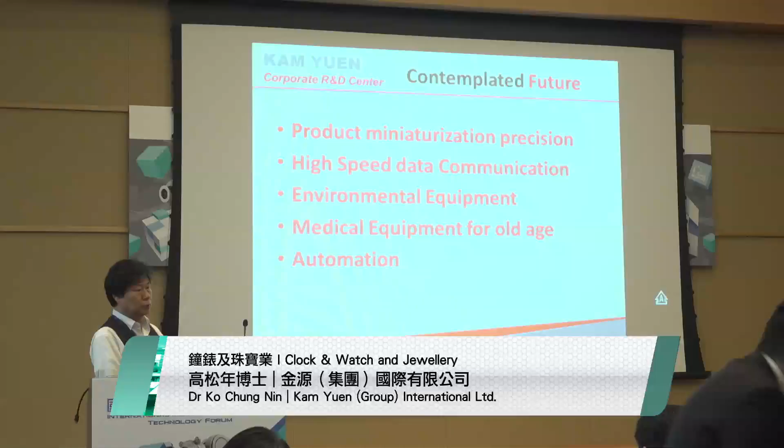The first thing you can look at is product miniaturization. A lot of products are getting smaller and smaller because of the requirements of space and lack of energy to operate it. It means things have to be more precise. So precision engineering will definitely be a hot topic in the future. This is something I anticipate, and I have to build my team towards this area.

The other thing is high-speed data communication. You always find people saying it takes so long to download a film, so preferably they want to download within 1 microsecond. That is the kind of voice coming from consumers. So the data communication business is one of the key areas in the future too.

Thirdly, environmental equipment will definitely be one of the hot topics, because environmental problems are indeed a big problem. How do we go about it? We can make ourselves and our habits more environment friendly, but also from the manufacturing point of view, we should try to make equipment that can serve this market. This is another dream I have, to make something more in that area.

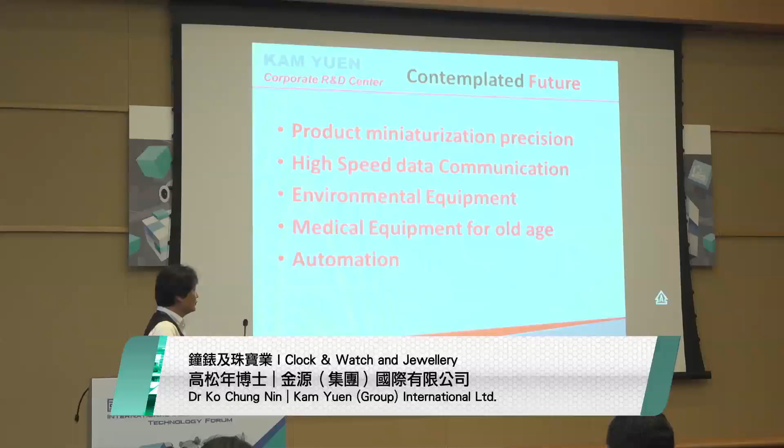Medical equipment is definitely a hot topic because people are getting old, regardless of whether you're in Japan or Hong Kong. By 2020, I think 1/5 of the population in Hong Kong will be over 65. So that will be a big market regarding all the accessories and equipment for helping the elderly.

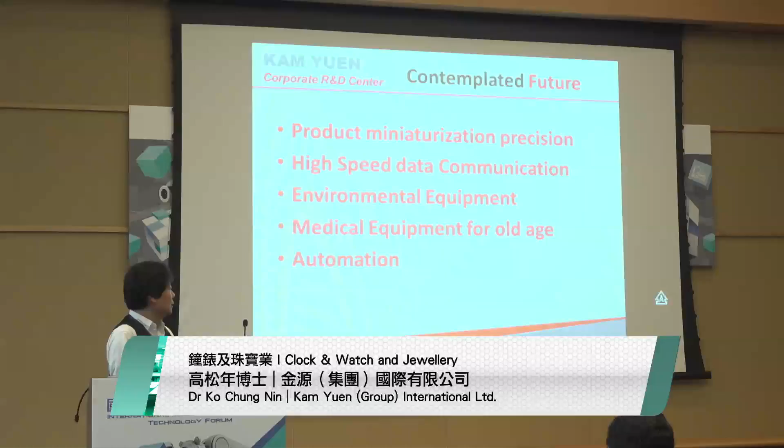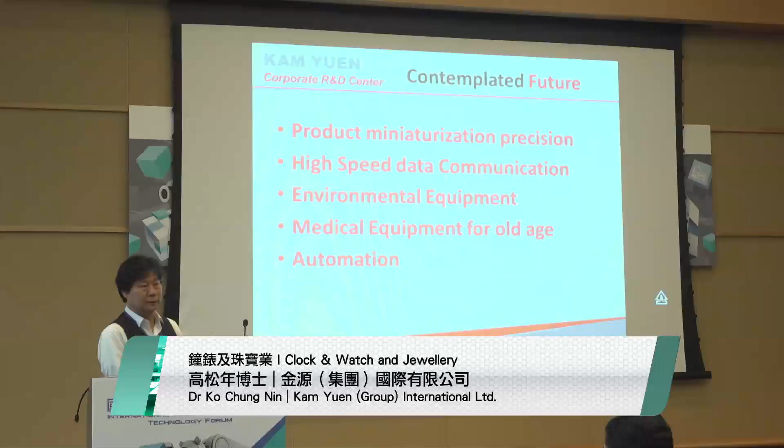And lastly is automation. Automation is necessary, indirectly because of the old age problem, since we don't have enough laborers, and because labor cost is expensive. There are many reasons for automation to happen, but automation doesn't happen alone, as I said before. I will explain more in the coming slides.

So our business in Kam Yuen: we try to help our customers solve their problems, looking from the eyes of our customers, trying to find out what their problems are and help them. Not our problems, but their problems is what we mind.

Secondly, new material application is something we want to further develop, because new materials are a must. If you want to go for precision and more sophisticated applications, new materials are really necessary. Precision engineering, as I said, will be getting more and more popular.

Sensors are one of the things in the upcoming future. I think most things in the future will have sensors, because we want to save money, save time, and save a lot of space as well. So sensors will be one of the key areas, and something we're working on too.

Automation processes and equipment, we are definitely working on that, not for external use, but for our own use, because we have about 5,000 workers and want to reduce the number down to a reasonable level. So automation process is a must, and we can help ourselves. Maybe later on we can help others as well.

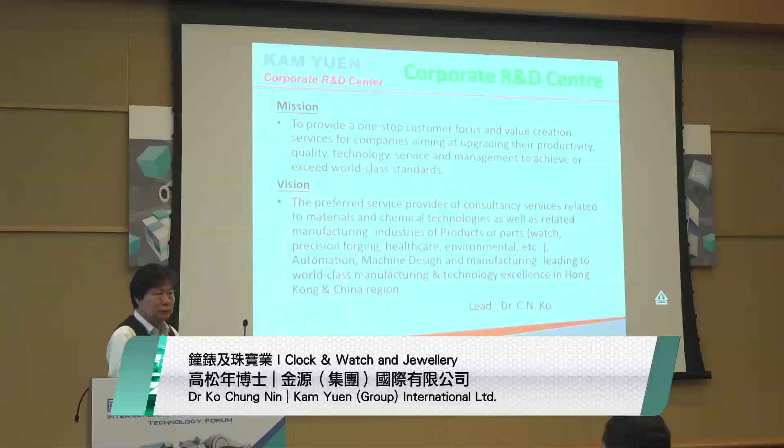I think if you look at the world nowadays, people are trying to separate. They don't want to combine or work together. You can see Brexit, and you can see what's happening with Trump. People want to retain their own jobs. Why? Because people are afraid of competition. But without competition, we will never get new jobs. So competition is a prerequisite, we can't avoid it. That's why if you want to get a job, I think you have to be better.

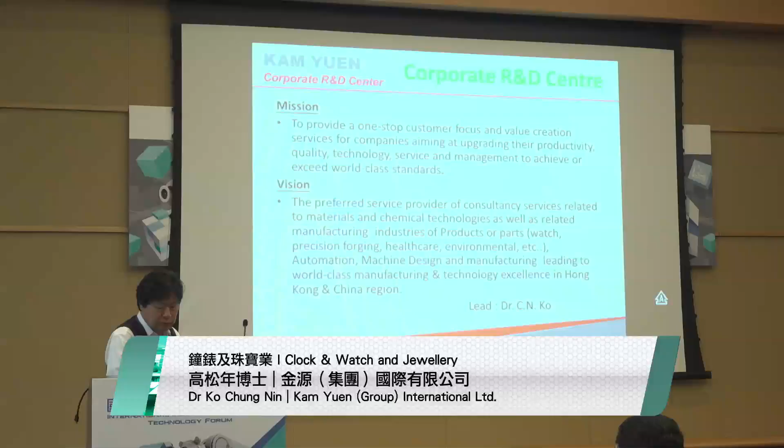Our vision is to be the preferred provider of consultancy service related to materials, chemical technologies, as well as related to manufacturing of products and parts. Watch, precision forging, healthcare, environmental, automation, machine design, and manufacturing, leading to world-class manufacturing is what we are striving for.

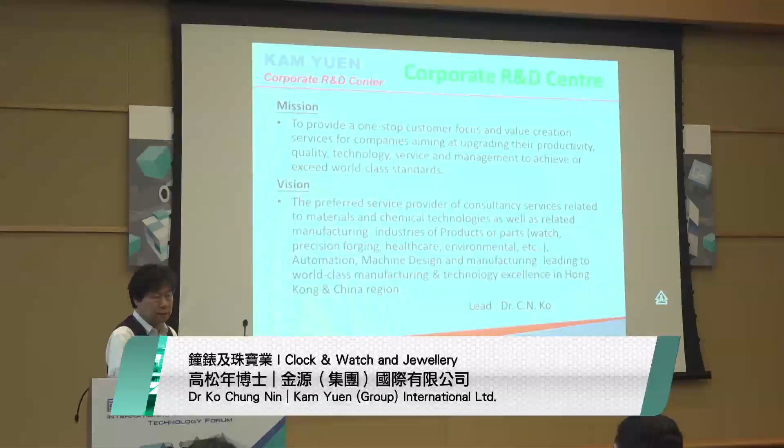Our R&D team doesn't contain a lot of people. It has less than 50 people, but we all need very good people in our team. We don't want a lot of people, but we need people who are really keen on doing R&D.

So basically, we have four blocks. The main thing you have to look at is applied R&D. We are not doing R&D for the sake of publishing papers. We are doing R&D for the sake of getting into the market. We have identified a few key areas we focus on. One is materials technology. Whatever industries you are in, at least in China or Southeast Asia, you really need to understand your materials and how to apply them. So we have our own R&D lab with a lot of analytical equipment, helping us do various things like reverse engineering and product design, etc.

Failure analysis, of course, and simulation modeling - this is one of the key areas that I think is missing quite a lot in Hong Kong, and I think this is very crucial. Whatever project we start with, you don't start with making a product and testing it. Actually, you should start with brainstorming and finding out the ideas, and make sure how it works and whether it really works or not by doing a lot of simulations and virtual reality, to make sure that what you intend to design and make actually works out before you go and make your prototype. You don't do simulation to prove your prototype, you do simulation to get your ideas at the beginning before your prototype is born. So this is why we're so concentrated on this. I'll show you something about this in due course.

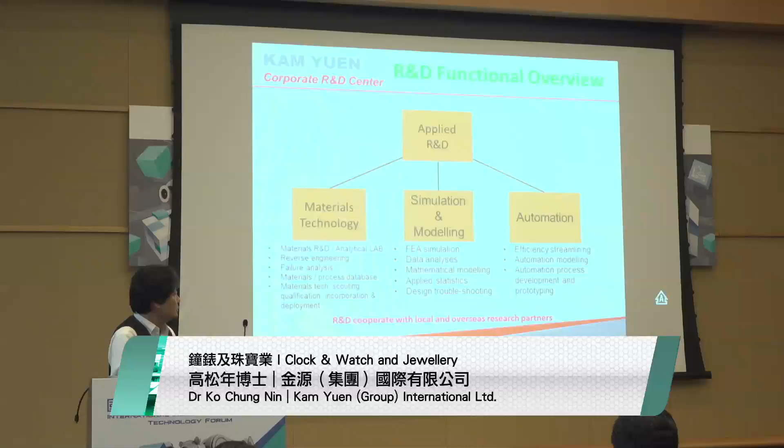And then automation is the part I will focus to talk a bit more about. It's basically to do automation in a factory. You don't go and buy machines and use them in your factory right away, because then you can't really do much automation. Automation can only be done if you actually do lean manufacturing first. Before you can do lean, forget about automation because you're wasting money. So first of all, get the lean done, and then you can go for automation.

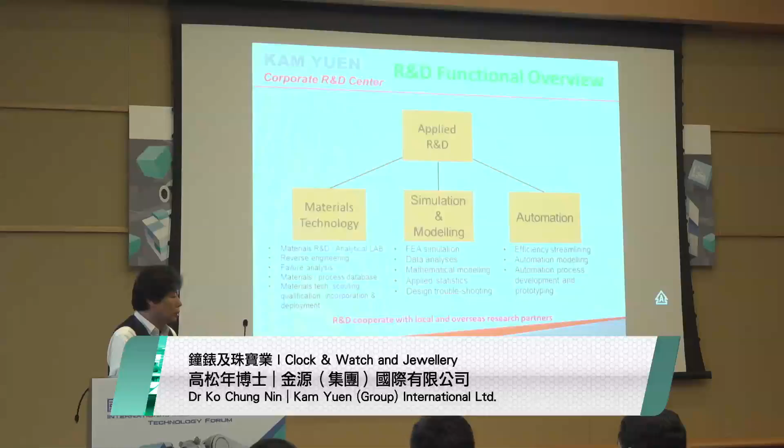When you do automation, you should not automate a complete line, where you press a button at one end and get something out the other end. Yes, you can do it, but it's very expensive, and it will become obsolete very quickly too. So what you have to do is build some building blocks, small automation modules, which you can then combine together to form your big cells and big automation lines.

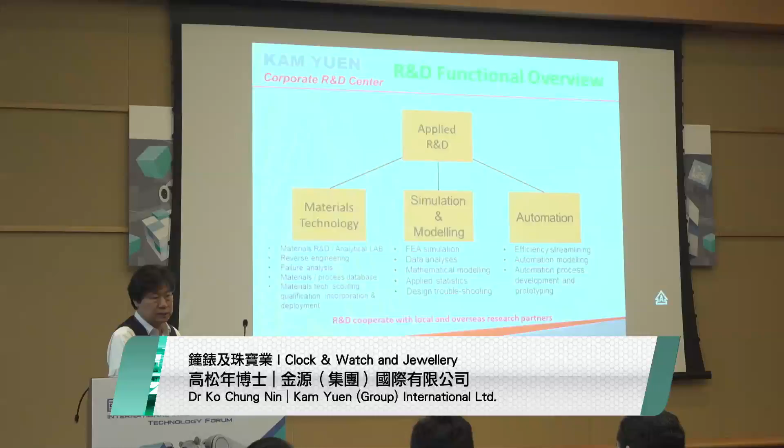We can't do everything with my own team, because there are so many things where we need to seek help, and we don't know, or we have no equipment. So we try to cooperate with local and overseas research partners. This is one prerequisite: you work together, then you get something that we can share together.

Our lab, as I said before, we use for raw material assurance, reverse engineering, and failure analysis. These are the day-to-day things we do, apart from material research and product design. So I'll show you one example of what we do.

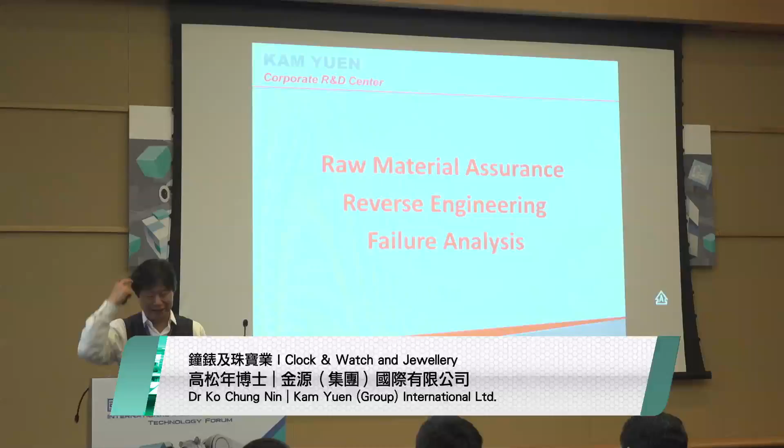I think you know what these mean: material assurance and reverse engineering. Reverse engineering is when you want to do something, so you buy one, dismantle it, and analyze everything inside to see how it's made and how the parts combine together. It looks easy and sounds easy, but it's very difficult because there are many things inside that you can't see just by dismantling it. But anyway, that's the first step.

Something to share about this case: we had machines which kept failing. We have very large bolts here - you're talking about M30, something really big. And they kept failing, all of them, 16 of them, and we didn't know why. We went back to the design and couldn't understand why it failed. It had worked for a while, but it still failed.

So we took the bolts in and analyzed them one by one. We took the hardness - very simple, we just measured it. We found the hardness was actually something like 32 to 40 HRC. But we thought we were buying 12.9 grade bolts, which should have 38 to 44 HRC. So actually, we paid for 12.9 but got 10.9.

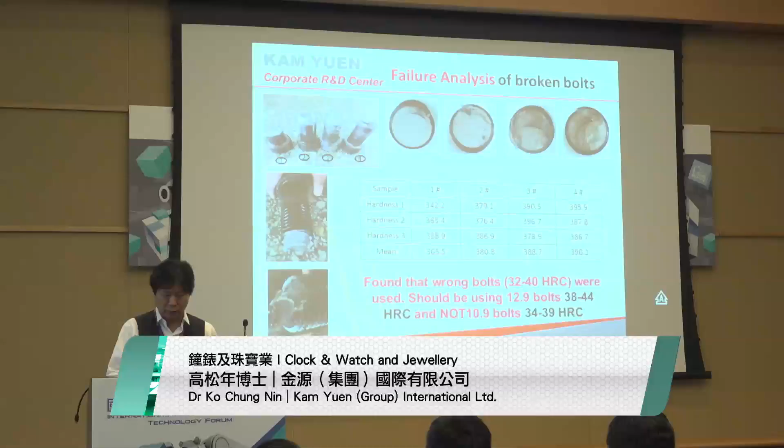So actually, we had been cheated, but these guys didn't know. They kept using it and put it in their machines, and that failed. We only found out once we got this failure and looked into it through analysis. This is a pretty bad thing. After that, we had to change all the bolts in every machine in the field, using much more qualified bolts. So this is one example of how we use the lab to help prevent problems.

They want low cost. So how do you make something low cost? You don't start with machining from the beginning - you do forging first. Once you've done a near net shape forging, then you do machining, so the cost comes down. Outside in the market, it's very competitive - you're talking about cutthroat prices. If you don't take this kind of approach, I don't think there's a chance to get a job.

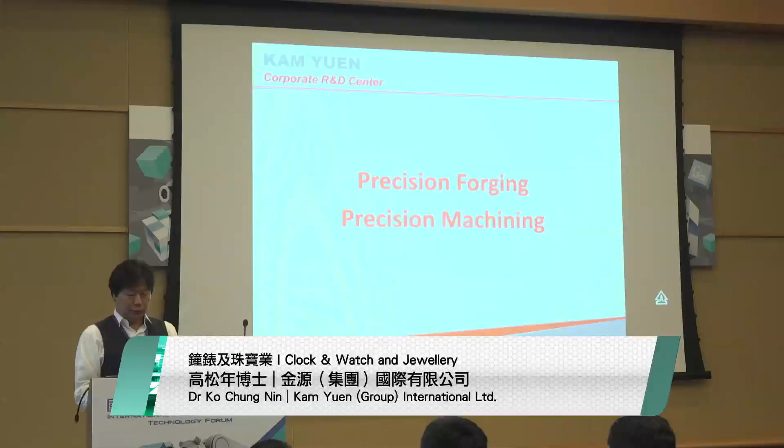So in our own watch cases, we actually do a lot of simulation as well for forging. Before we do the actual forging, we run the simulation so that we can save a lot of wasted material. Using simulation first for forging is a routine way that we are doing it now.

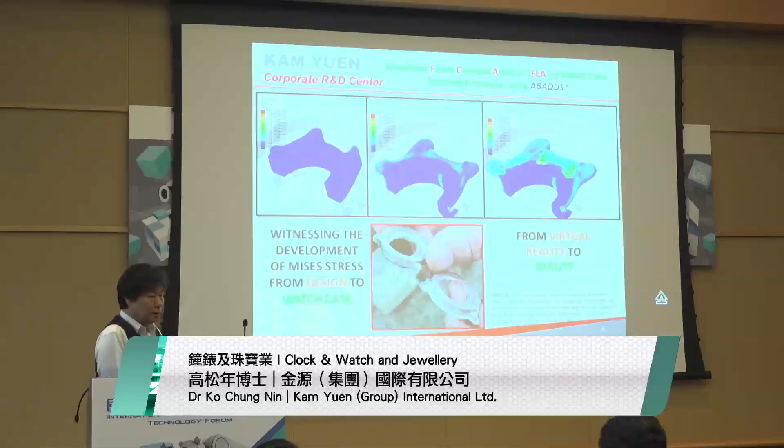Because if you don't do analysis, you forge something out and then you get a lot of these flashes, and there's a waste of time, waste of material, and waste of manpower to trim it off, and then there's grinding - a lot of rough grinding, fine grinding, and so on. So why not remove the material right at the beginning when you do forging? That is the philosophy - you save right at the beginning.

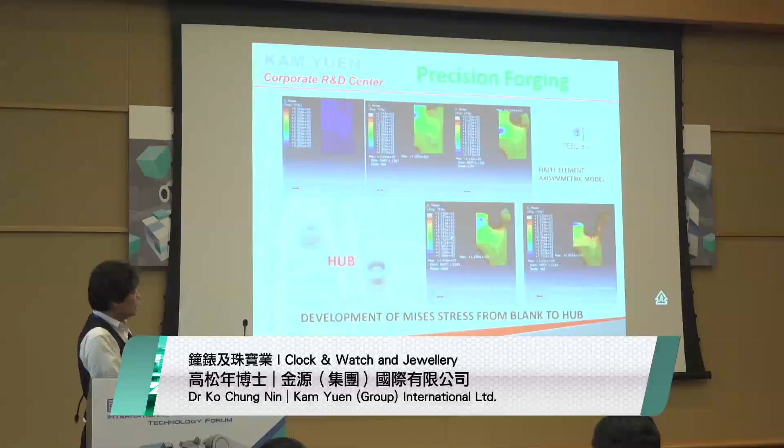We actually found out that at certain points it's not so easy to figure out that it will work. Only after the simulation we find out that it should work, and then we make the tools and then do the actual tool to make the hardware. So I show you one of the examples.

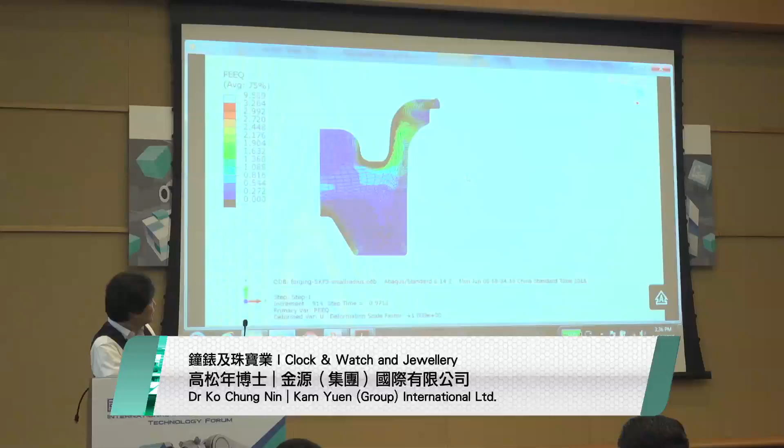I hope it works. Okay, so basically this is a simulation half model. This is the equivalent plastic strain here. So the whole blank is like this, and this is a symmetry line. So you see, it's very difficult to find out if it really flows over, because it's difficult to converge here. So it takes a lot of iterations to find out that, oh, it really does the job.

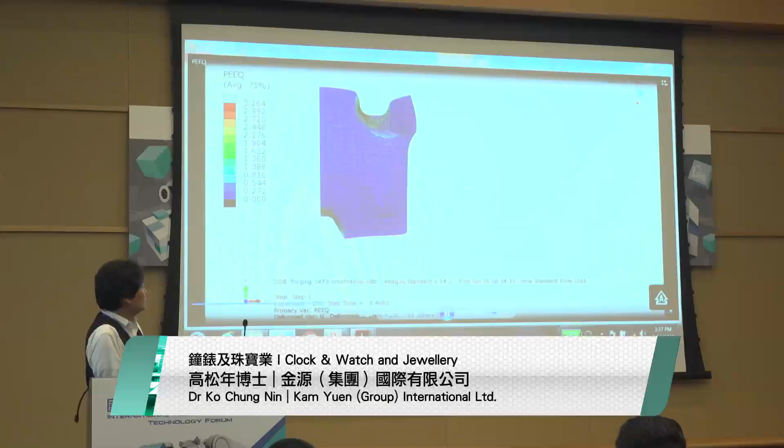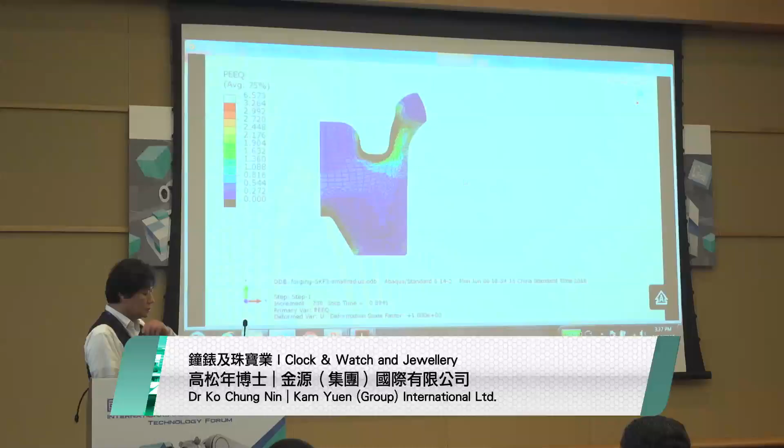So again, without the simulation, we probably would be trying maybe 10 to 20 different tools to see if it will work or not. With these, we only need to try 1 or 2 tools to make it almost perfect. So you see the importance of simulation. Why I mention this is because simulation is part of the technologies that we deployed in our R&D center. So just to share with you what it can do for us.

And this is another case of making a kind of holder. I won't tell you the customer's name, but basically this is made of aluminum. Again, we are using elastic plastic analysis and simulate it with the forging. This is done before the actual tool was made, and you can see how the thing is formed.

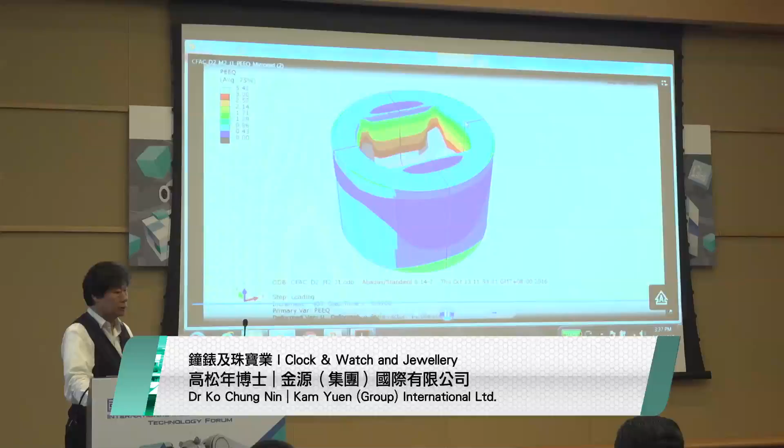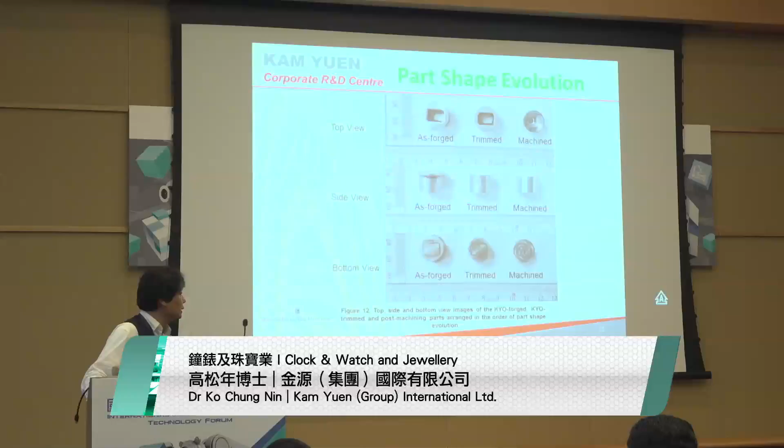And the material can't be made too thin, because one of the parts has to be pretty thin in the final product, and we cannot make it so thin because you get fracture. So we don't do that. We leave more room there, and that's actually done at the end by machining. That's what I was saying before. You can't just use machining. You have to use forging plus machining as the approach towards making a lean part, a part that saves costs.

Okay, machining doesn't just involve these. You have to be able to measure it as well. I mean, after my machining method, I want to find out what kind of surface finish I have on the surface. You can't just say, oh, this is good enough, because your naked eyes look at it and it looks smooth. That's not good enough. Actually, we measure the roughness using optics and find out the profile on the surface.

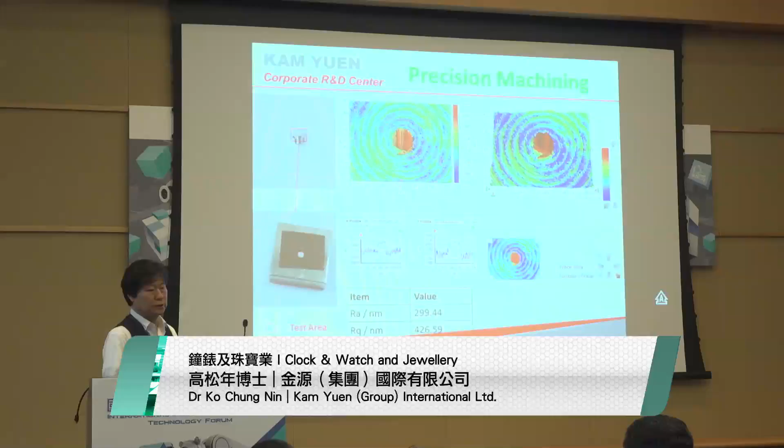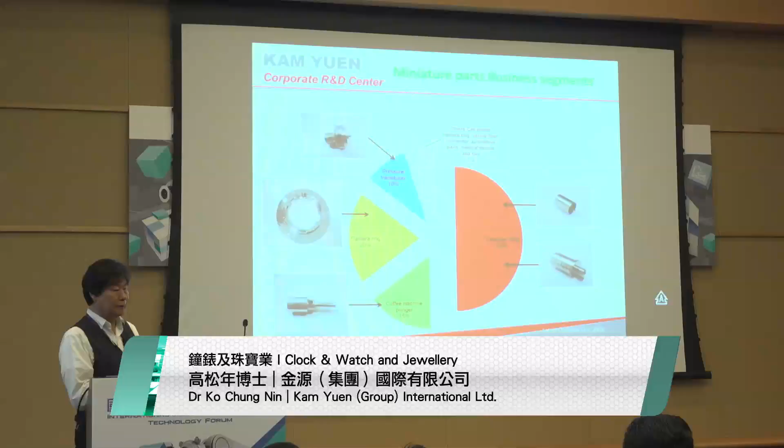Okay, so on the one hand, we want to do something precision. On the other hand, we want to make sure that we can measure what we have done. Otherwise, you cannot say that you're precision. So this is the way that we are moving forward. And these are the parts that we make. Apart from watch cases, we also make high precision parts as well. So these are different business areas that we are embarking on.

Okay, now I'm coming back to some automation cases that I want to share with you. Automation on its own is not just a piece of paper where you write down and draw what you want to do, because there are so many things affecting it, like the precision. How do we control the precision? It's not just buying a very accurate servo motor and so on. All the structural bending and deformation has to be included; it has to be thought through.

So you basically have to do a structural analysis to find out if, at the end of the day, the tip of the finger can maintain 0.02 millimeter precision, let's say, or 0.01. Why? Because if you want to make a watch case, that precision has to be within 0.01 mm. So the way that you position it, put it in the chuck, has to be more accurate than that. Otherwise, you can't produce something within 0.01 millimeter. So this is one of the pick-and-place machines I want to share with you.

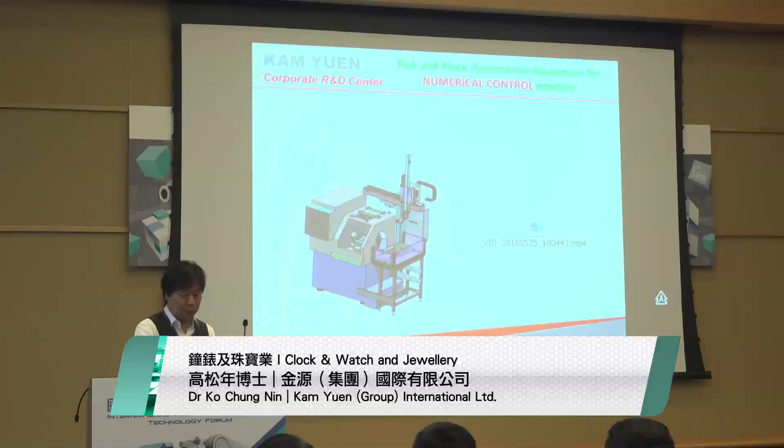We have a lot of these machines in-house, because they are pretty old machines, 10, 20, or 5 years. But my boss asked me to automate it, but you have to use the old machines. So you just have to add something onto it, a pick-and-place arm or whatever, but a low-cost one, not expensive. So I got the job, and then I had to go through and look at it and find out how we do it. And this is the result.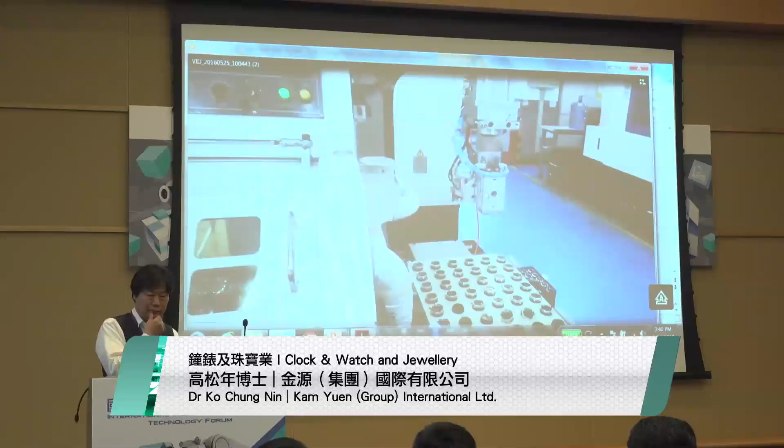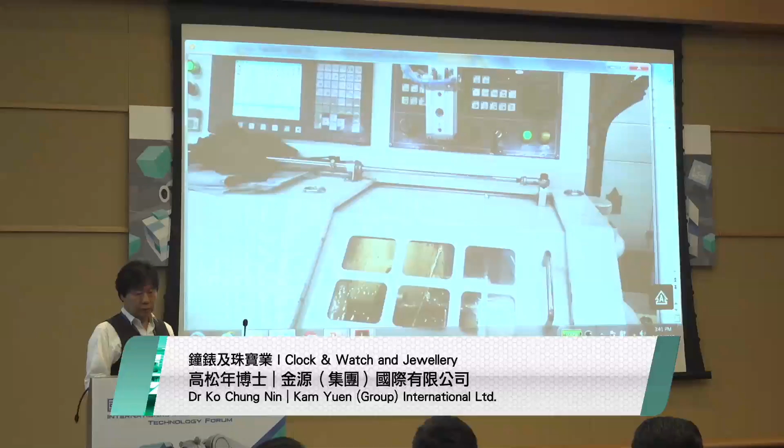Basically, this is an automation process that we have made ourselves from design to manufacture and communicating with the NC machine, the turning machine. So the mechanics is done by ourselves, the software was written by ourselves, all the electronics and controls were made by ourselves, okay? So

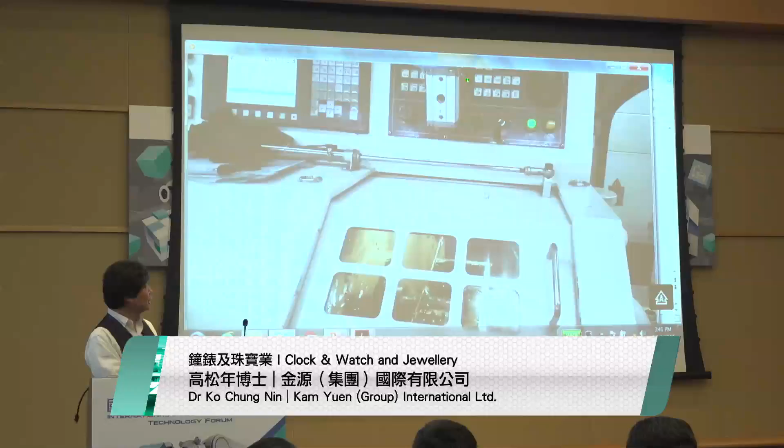it's gonna take a bit long, but basically, now you pick up a watch case and then you come here and then you wait until this is finished. So our time to pick up is very fast, but the process inside is very slow. And so we can't do much about it unless we can speed up the production time, the cycle time in

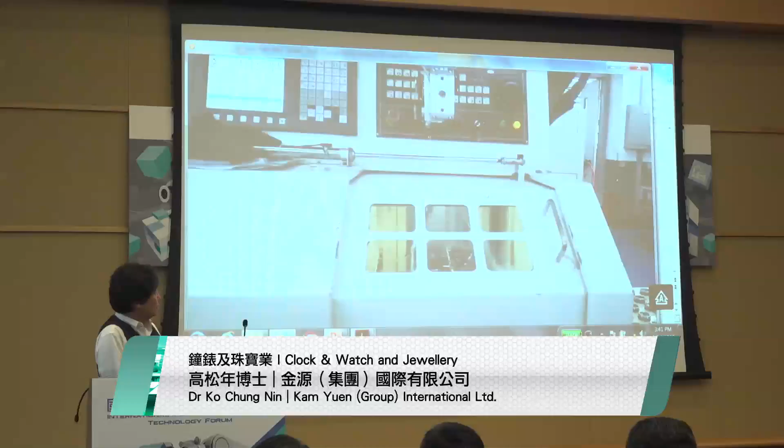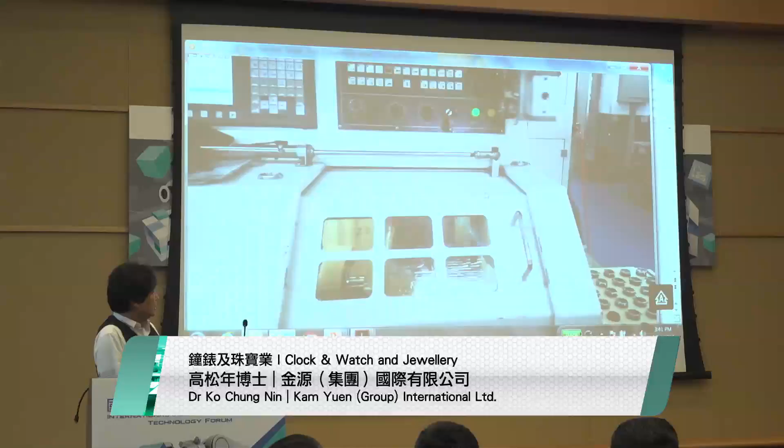here. Okay, you see that it's picking up, pick out the finished one, and then clean it, and then come down again, and then put the unfinished one, the one that just picked up, in here, and then you start working, and this guy will come up to pick another one. So this is what we call a module.

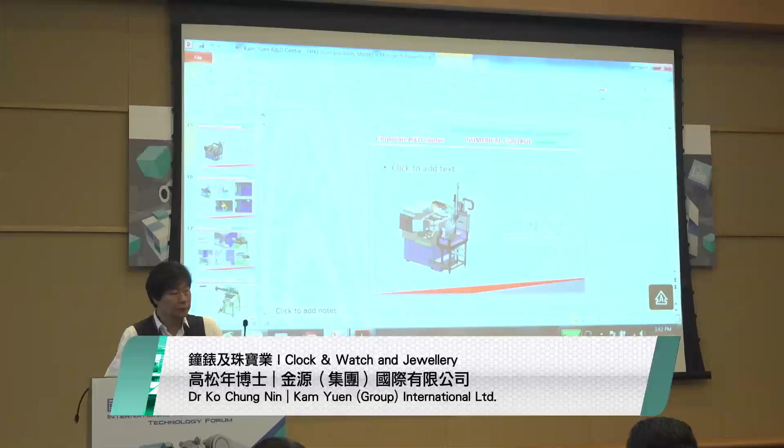We are not automating the whole line in one go. We're actually making a module and combine them like Lego, depending on the combination of different machines, whether you use a lot of NC machines or CNC machines, okay? So that really depends on the lean manufacturing process or how you go about doing it.

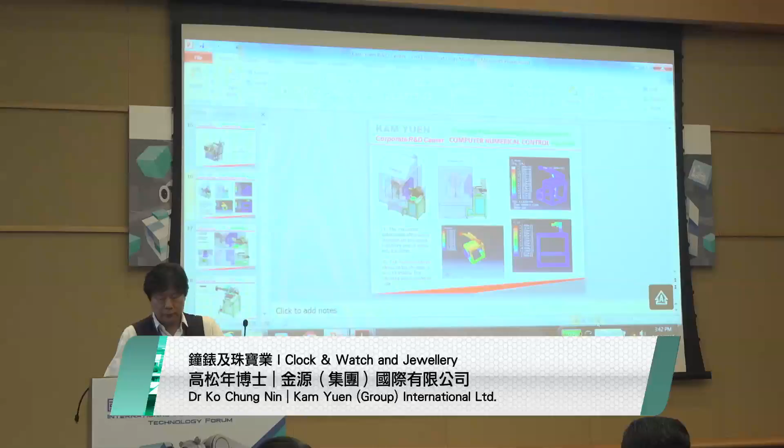So then you may ask, how do we guarantee that the machine is good enough before we make it? So that's done by means of, as I said to you before, simulation. So actually we do a lot of simulation before we actually make the hardware and test it in-house, and before we bought the components and assembled them together and tried.

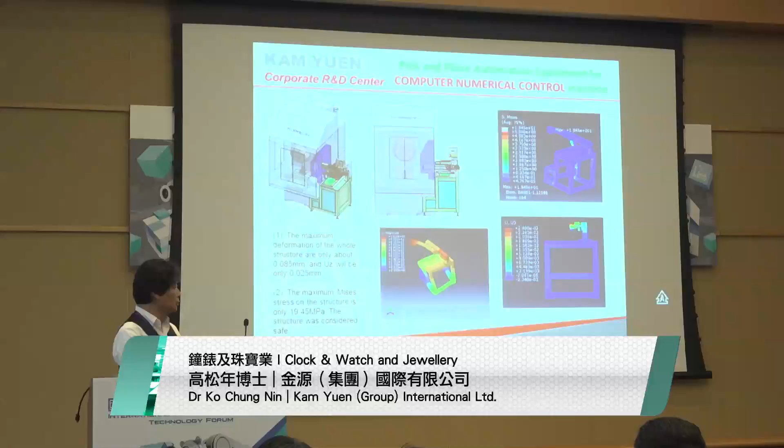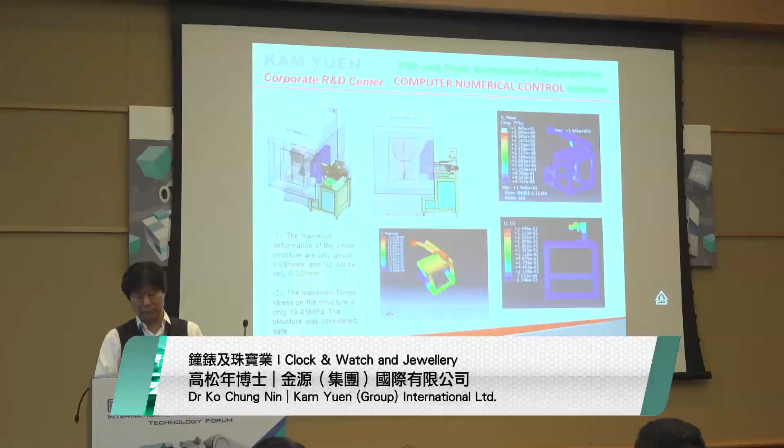So actually what we do is that we look at the stresses to see if they're all well below yield stress. And also the most important thing is the position, the final position of the arm. Does it reach the precision that we require? And also we look at the frequency analysis as well to find out that it doesn't vibrate due to resonance or something. Okay, so we do that, and we have used this method many times to work on even CNC machines. Just now what you saw was the NC machines.

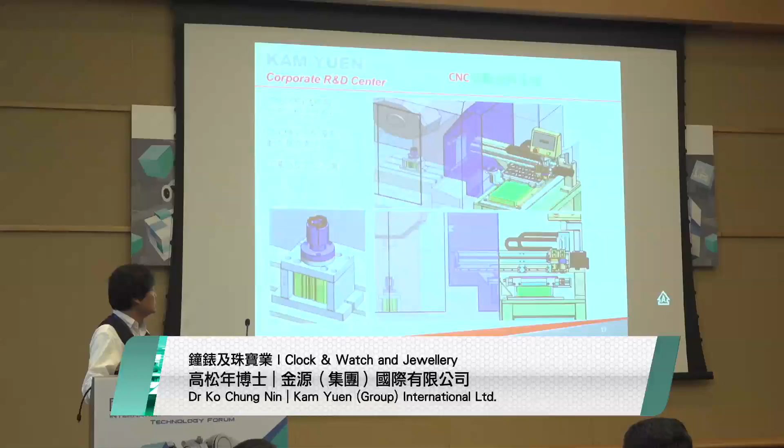These are CNC machines. We have maybe something like 500 machines of this kind. So we have to automate all of them. So basically we just run through the same philosophy and approach and form our own automation line. If you look at this one, I can show you what it can do. It works. Wow. Oops.

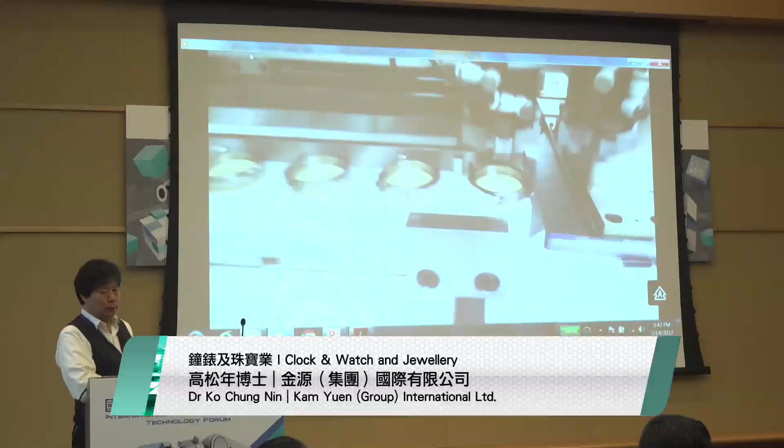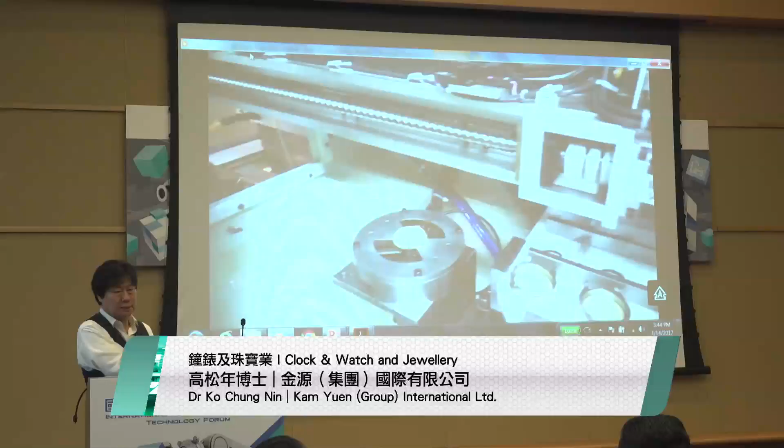So this actually was taken in our trial run. So, oops. So it's an automation again on picking up watch cases, put it in our CNC machines. Okay. So pick it up, go over here, position it, and then we move up and wait at the window, and then we go in. Inside there is the CNC machine. Okay. And we come back.

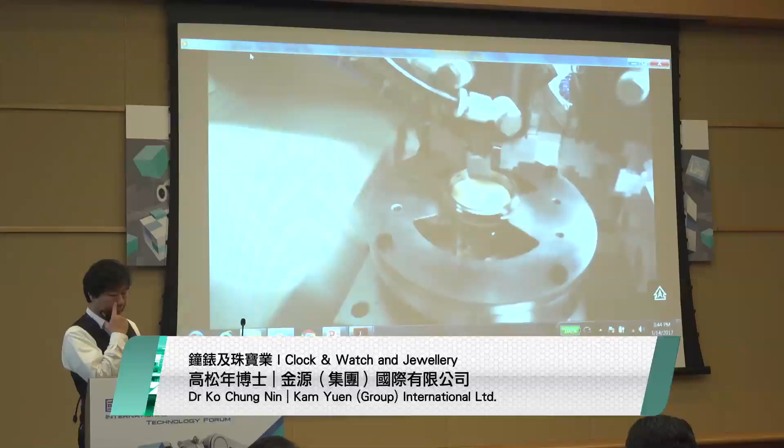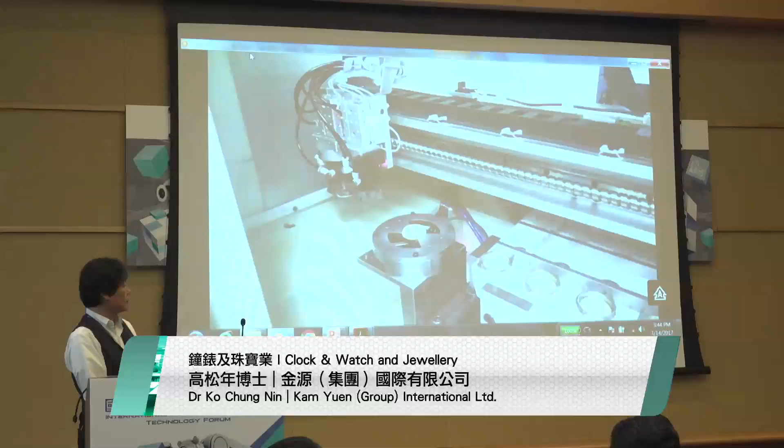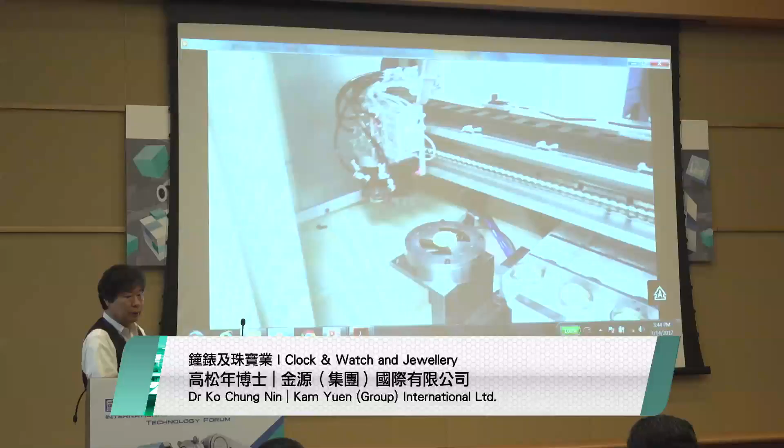And then go in again. It goes in and out because we want to clean the chamber, clean the chips without ruining our robot arm. So you see that these watch cases do not have to be put in a particular direction. It can be put in any orientation, and we can handle that. This is the first version, and we are developing other versions now, which are more sophisticated in picking up watch cases.

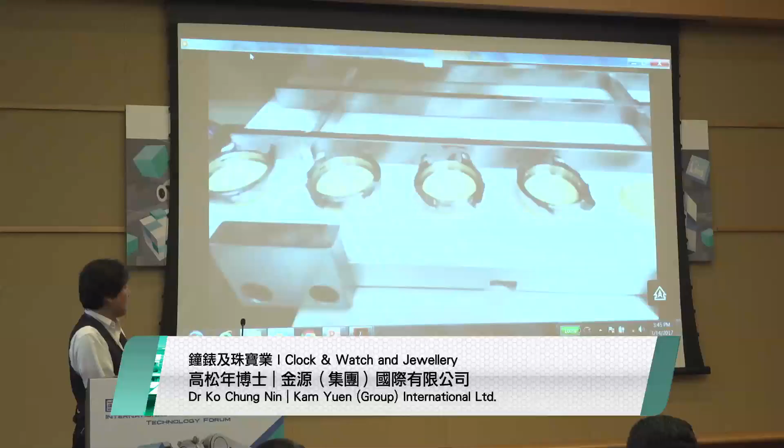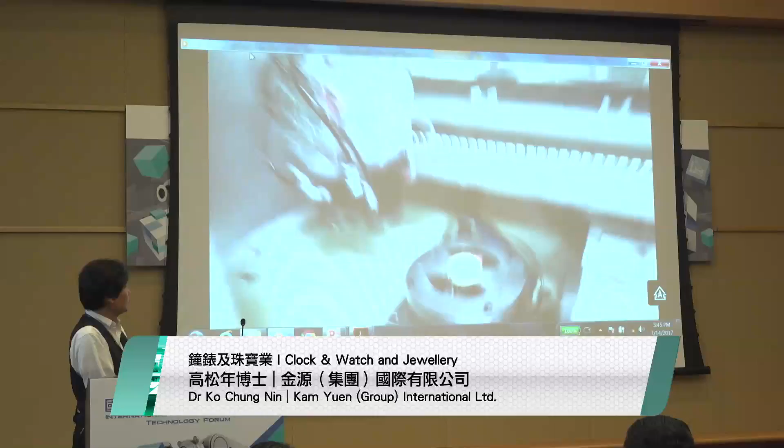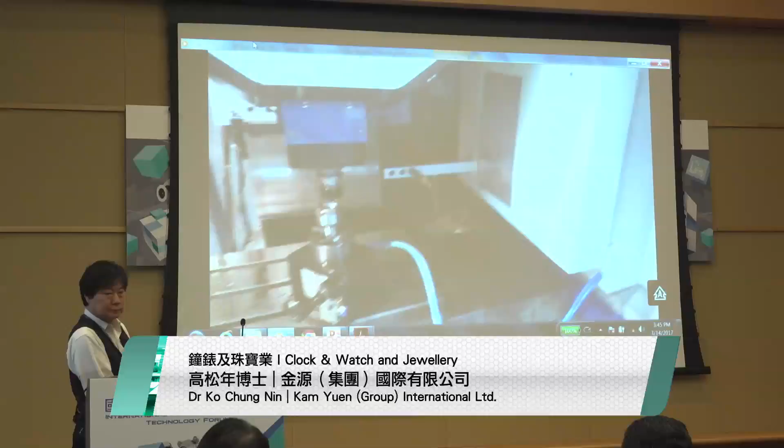Here, this is the CNC site where you do the machining. Okay, I think I don't want to get you bored. I will continue with other slides.

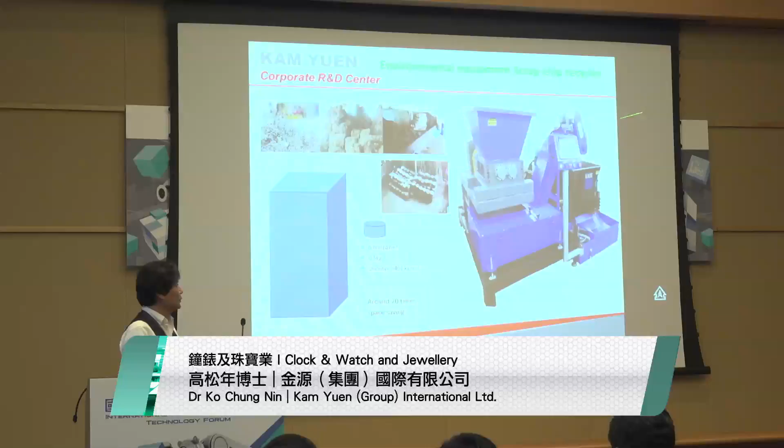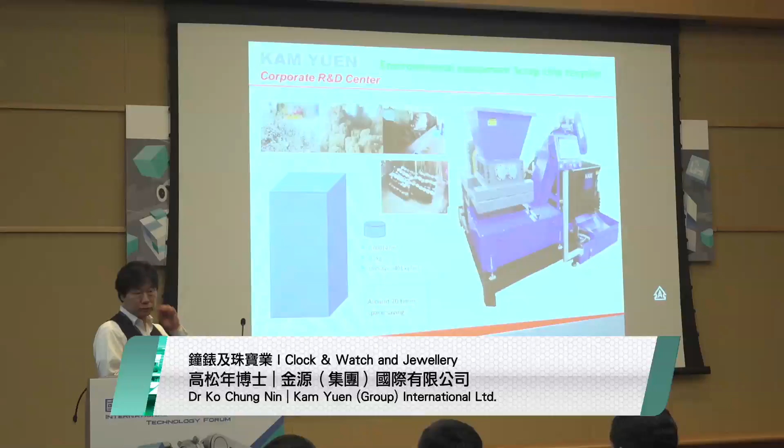Some industrial cases I want to share with you is the environmental equipment. You know, because we do a lot of machining, we produce a lot of scrap. And how do we deal with this scrap? And you see, this scrap is very messy and getting in anywhere. You need a big storage to store it up. So we have thought of compressing this scrap into neat little cakes and be able to store it nicely like this and not like this. Okay, this is the machine that we produce, and we are now already selling it into the market.

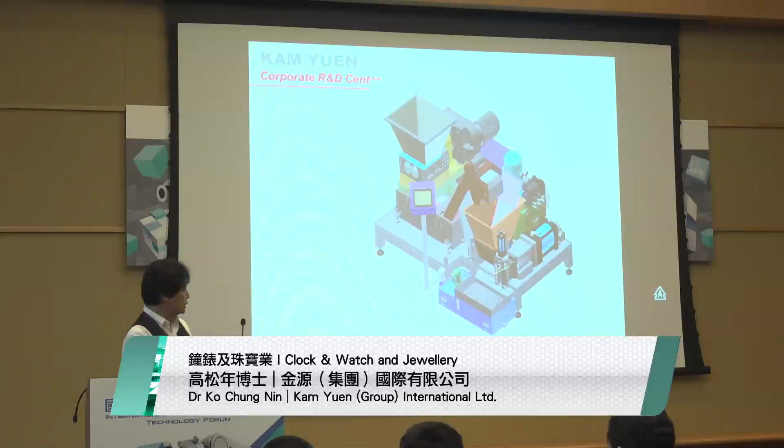And this machine basically is like this. You put in scrap material, and then you have a shredder here, and after shredding, the bits will come up here and go into this pneumatic compressor, and then you press it and form a cake and it comes down here. Okay.

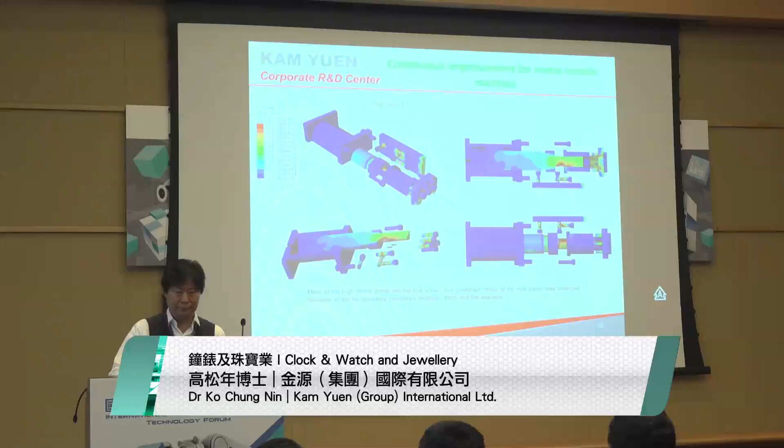So when we made this machine, we again did a lot of finite element analysis to safe-proof the integrity of the machine before we actually made the hardware. And when we do this analysis, we simulate the preloading of the bolts as well, so it's very accurate. You preload it the way you should per the design book, and then you find out if the machine will fail structurally. So whenever you get high stresses, you reduce the stresses to make sure that your machine has a low average stress, so that it won't have early failure by fatigue.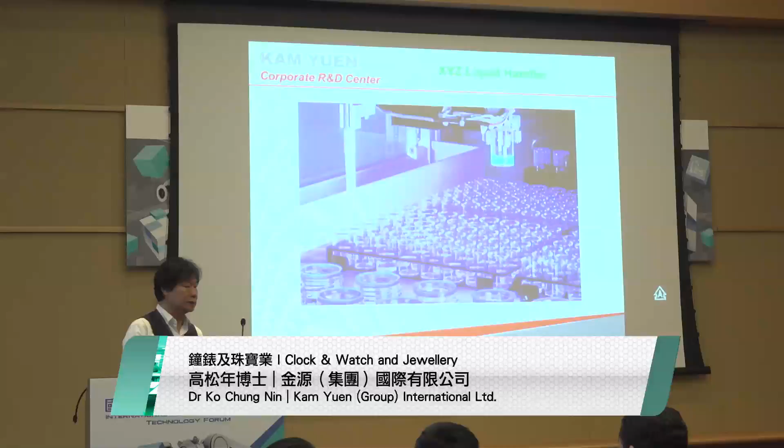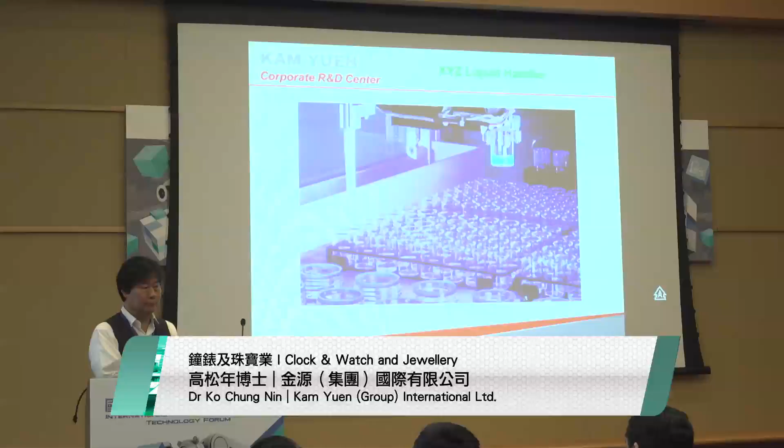Okay, another case, the XYZ handler, which is focused on the diagnostics market. You've seen people doing diagnostics, test tubes in the lab, and that's done by one person at a time. So that takes too long. So we have this mass diagnostics platform where you put a lot of test tubes in here, and then we have an XYZ liquid handler, which goes in, picks up some liquid, goes into another test tube, releases the liquid in that test tube, and then mixes them together. So with that, you're able to program most of the tests inside the equipment, and do a lot of tests at the same time.

Okay. What was our objective at the beginning? The initial objective was that people were making these kinds of machines, but only with 4 channels. They have 4 pipettes doing this injection at a time. So we increased that to 8 channels because we want to double the speed, the throughput. This is the initial product that we designed ourselves from a piece of paper. So how do we know whether this is going to work or not?

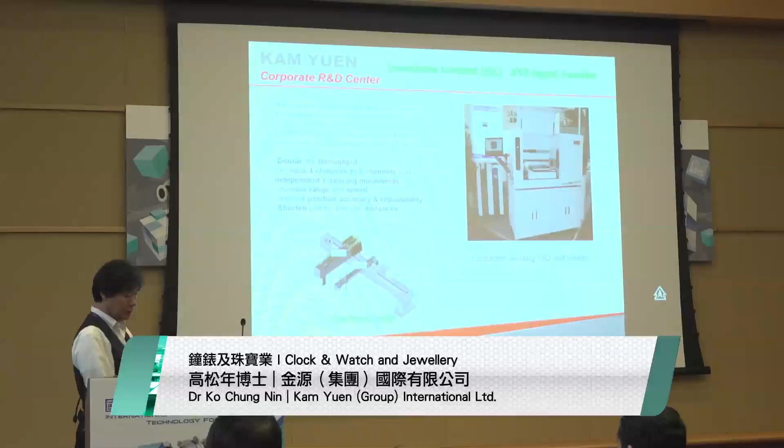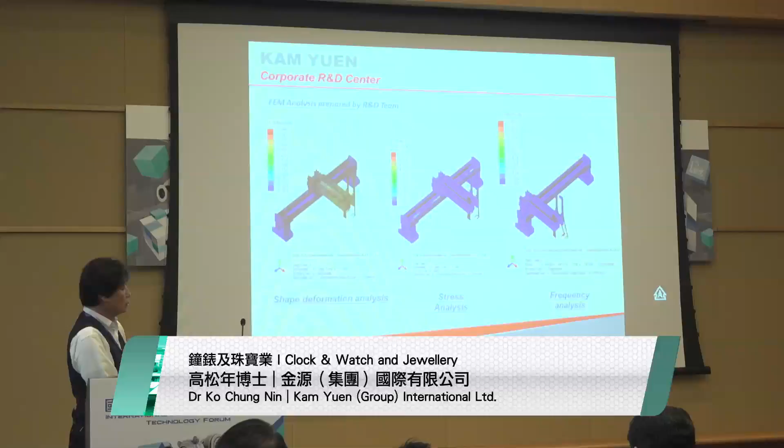So this is something that I want to show you. It's quite interesting. It's coming from the design modeling.

Oops, this is not working. How do you fix it? Oh, I think it's doing auto-saving on a big file. It will take some time because it's saving. Auto recovery. Okay, good.

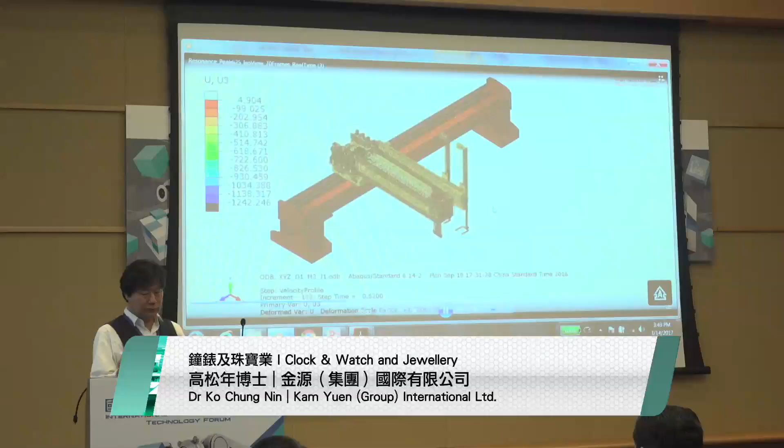Okay, the machine that you saw just now is still in the design stage. We haven't made the hardware. You see that it's trembling. It's actually vibrating. You see? So it definitely has a problem; customers won't accept it. This is all done by analysis. You see that it's really trembling. No one will accept it.

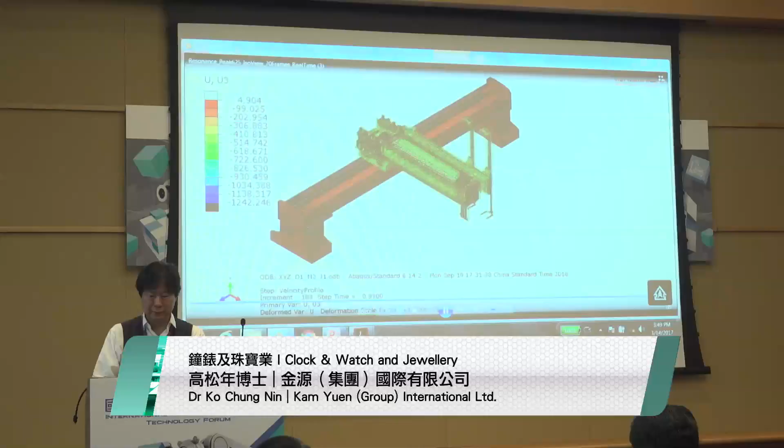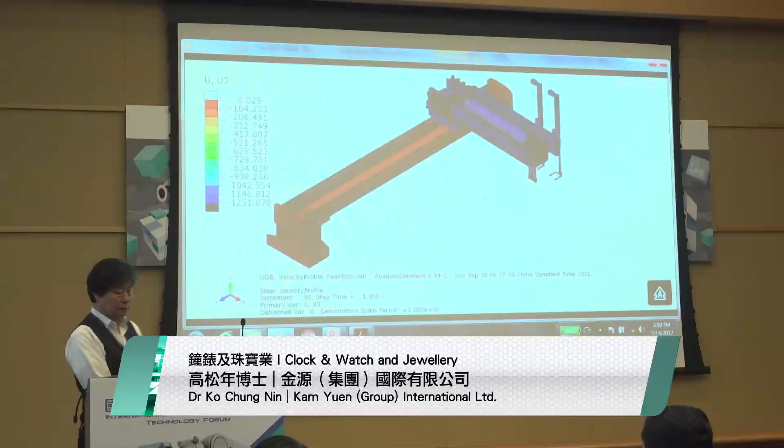So what we do then is improve it, modify it, and try to reduce the vibration. And this is what we got. Basically, it doesn't vibrate anymore after tuning some parameters. So again, this gives us a window of improvement: getting an idea and proving it using simulation. And at the end, we find out that it works in simulation. Then we are confident that we can go ahead and make the hardware, just to save cost.

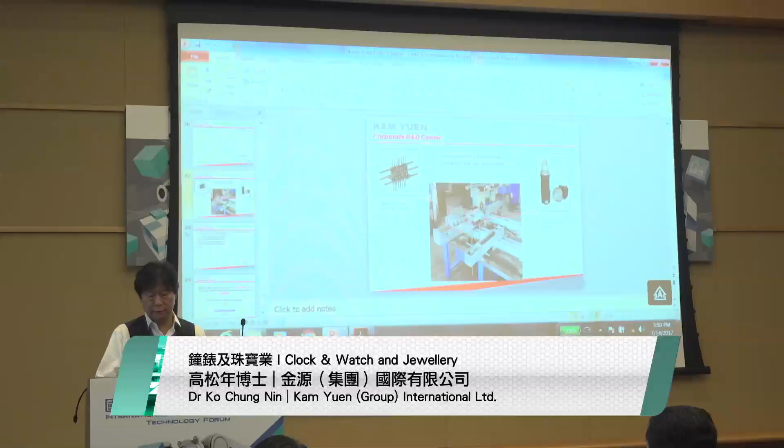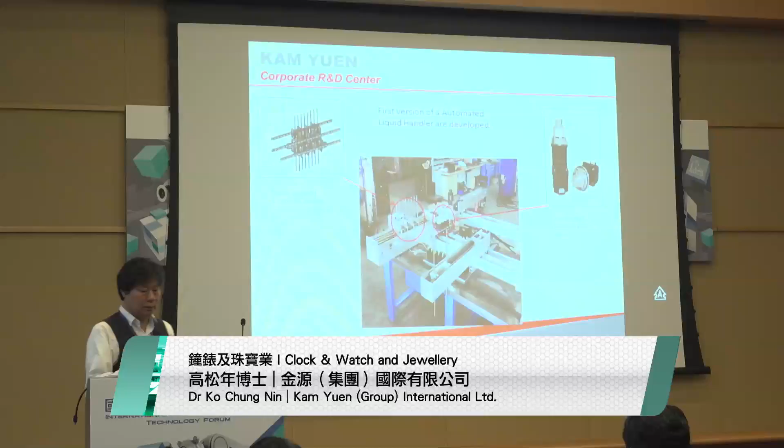This is what we manufactured in the end. We actually make our own pumps. We made the whole machine ourselves. Okay. Again, this is also a direction towards automation, because this is for enabling the diagnostics world to do a lot of tests, mass tests, at the same time. So this is also a kind of automation, but it's external.

Okay, we got some patents outside, so I just want to show you. Just an example, we've got some patents awarded back in 2006. Okay, I just want to end this presentation by saying innovations can make a big difference to our commercialization and for our dreams to come true.